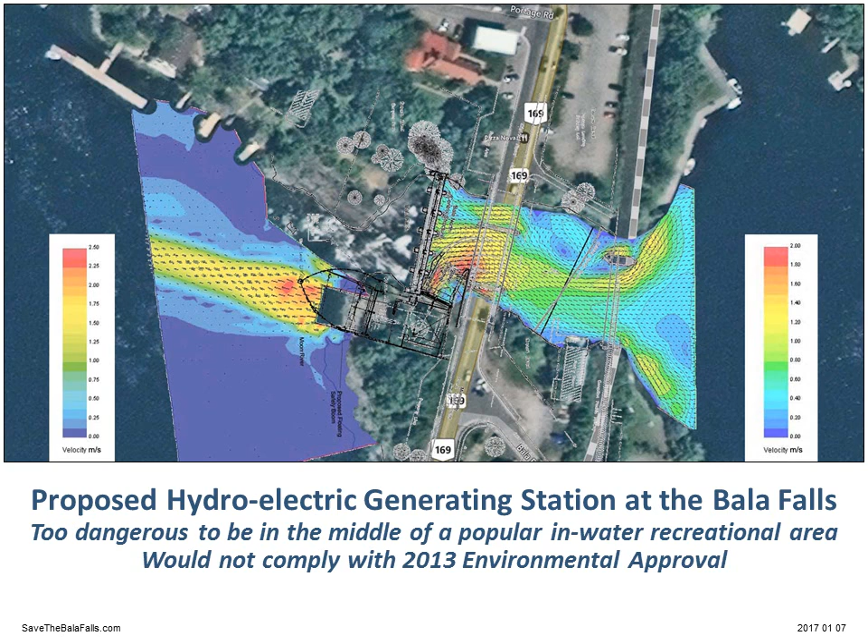It is January 2017, and after 11 years, the proposed hydroelectric generating station at the Bala Falls still has serious, unaddressed public safety issues. One of the public safety issues is that the proposed generating station would make the water in the Moon River dangerous outside of the proposed downstream safety boom. The upstream safety boom would need to be moved farther upstream, and during construction, the upstream cofferdam would risk damage to both the Bala North Dam and the district's highway bridge.

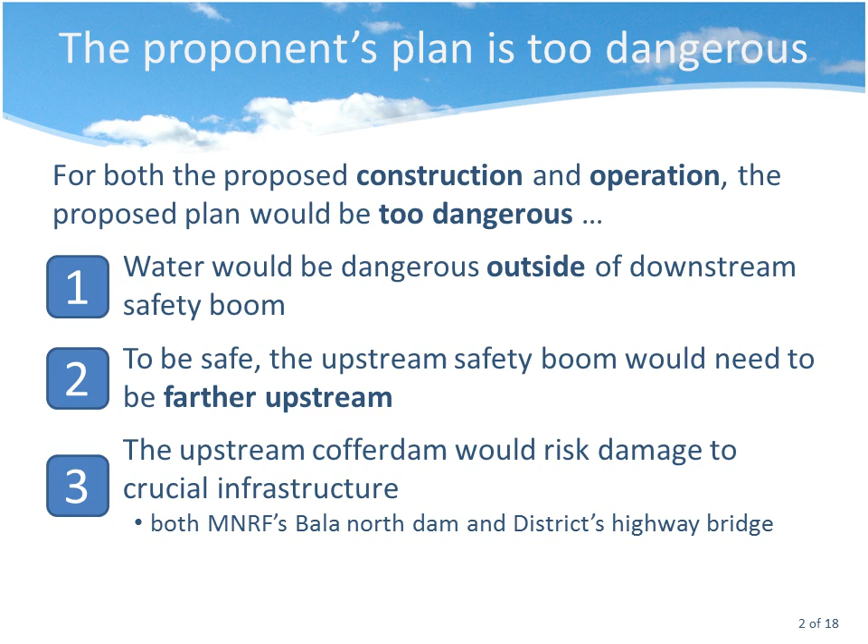Here is some background information on why these are serious, unaddressed issues. In 2011, the Ministry of Natural Resources and Forestry released a document, Public Safety Measures Plan for the Bala Dams. And one of the requirements in this is that the public be warned in advance of increasing flow to the Moon River.

Another item is the Canadian Dam Association has a document called Guidelines for Public Safety Around Dams, where they state that a safety boom acts as a physical barrier to delineate a dangerous water area. And the word delineate is serve as the outline of. That is, there is an obligation that the safety boom fully encompass any dangerous water.

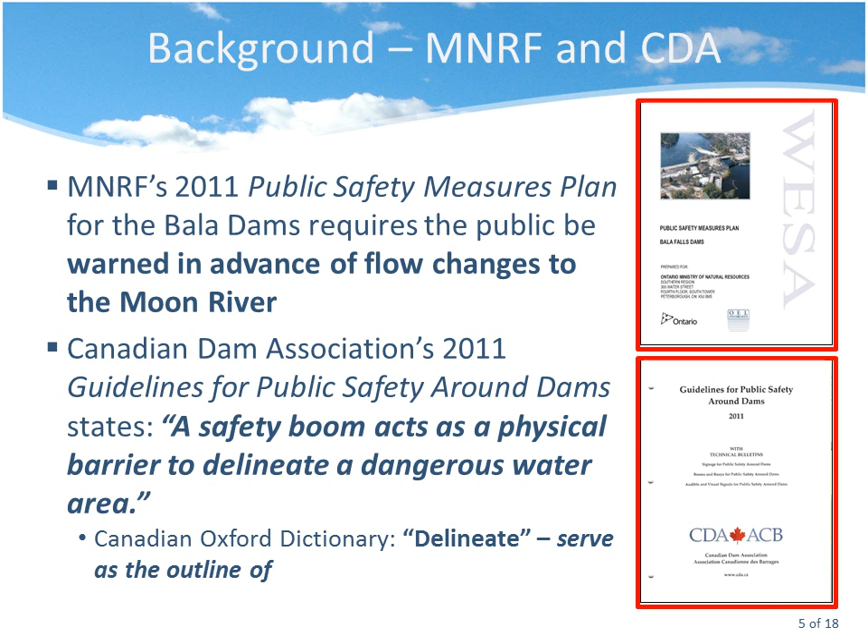As further background to our concerns, as part of their assessment for this proposed project, in 2012, Transport Canada completed a review of this proposed project in which they stated that the maximum safe water velocities are up to 0.5 to 0.7 meters per second. And as we'll see later, the problem is the proposed project would create flows more than double this outside of the proposed safety boom. Transport Canada in 2014 did release an approval under the Navigation Protection Act, but what's very important is to understand what this approval means.

The Navigation Protection Act has no mandate for the Moon River. Transport Canada has no mandate for any in-water recreation, such as the swimming, wading, and scuba diving that are very popular both upstream and downstream of the proposed project. So the 2014 approval from Transport Canada makes no statement as to whether boating would be dangerous in the Moon River as a result of the proposed project, or whether swimming would be dangerous upstream or downstream of the proposed project.

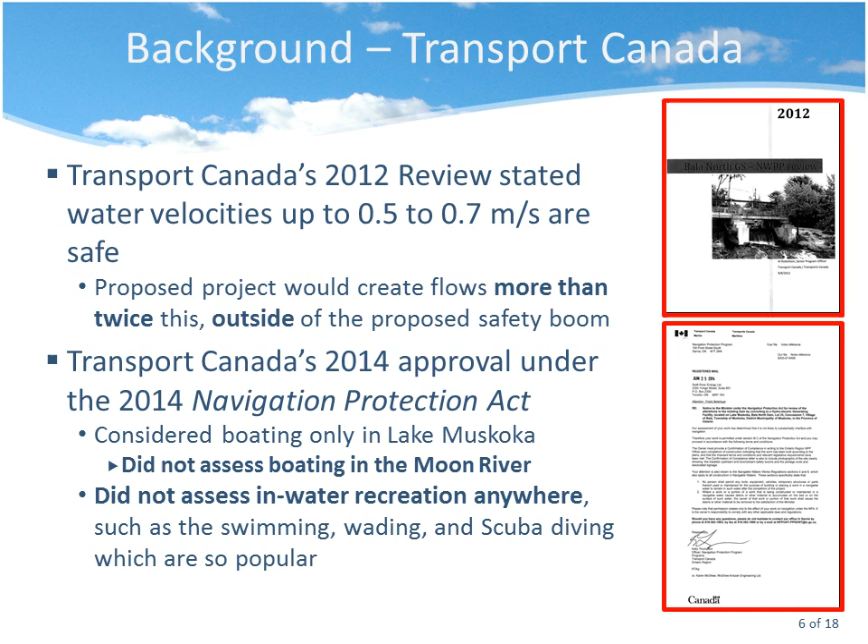So now we have this diagram, and what it shows is that the proposed generating station is outlined in the red box, and it would produce flows going downstream, westward, along the Moon River. And the problem is that the flows inside the proposed safety boom are just as fast and turbulent and dangerous as the flows outside of the proposed safety boom. And these flows would extend more than 160 feet down the Moon River outside of the proposed safety boom. That is, the safety boom would not delineate the dangerous waters as is required by the Canadian Dam Association.

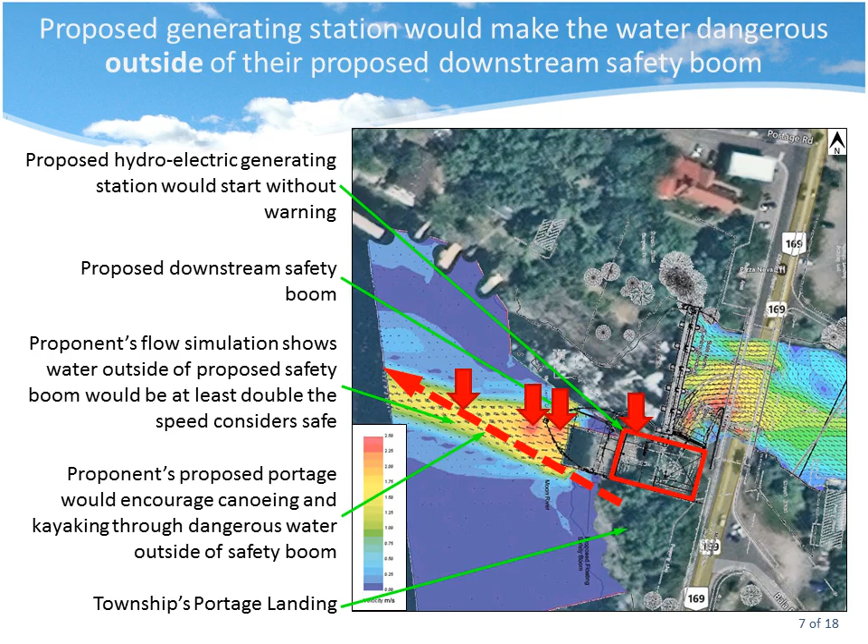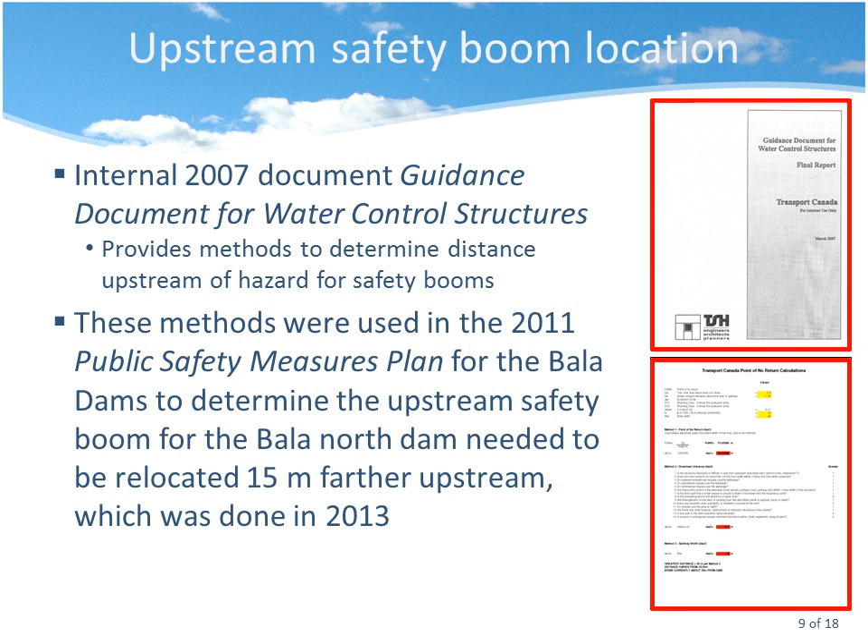The next concern is the location of the proposed upstream safety boom. The methods and calculations in a Transport Canada document were used by the 2011 Public Safety Measures Plan for the Bala Dams to determine that the safety boom upstream of the Bala North Dam needed to be relocated 15 meters farther upstream, which was subsequently done in 2013. The Public Safety Measures Plan for the Bala Dams found that the upstream safety boom needed to be 50 meters upstream of the Bala North Dam.

The Transport Canada calculations show that if the hazard, which was originally the Bala North Dam, is remotely or automatically operated, then it requires the safety boom to be an additional 10 meters farther upstream. So rather than 50 meters, it would need to be 60 meters upstream. However, in addition to the proposed generating station being automatically operated, the intake is upstream of the Bala North Dam. So instead of being 60 meters upstream of the Bala North Dam, the upstream safety boom would need to be 60 meters upstream of the intake for the proposed generating station, and that is, the upstream safety boom would need to be located about 75 feet farther upstream in the Bala North Channel.

The problem is, this would prevent boats getting to or from Purk's Place. Not being able to rent boats is an infringement on riparian rights, and this would require some negotiation or settlement that has not yet happened.

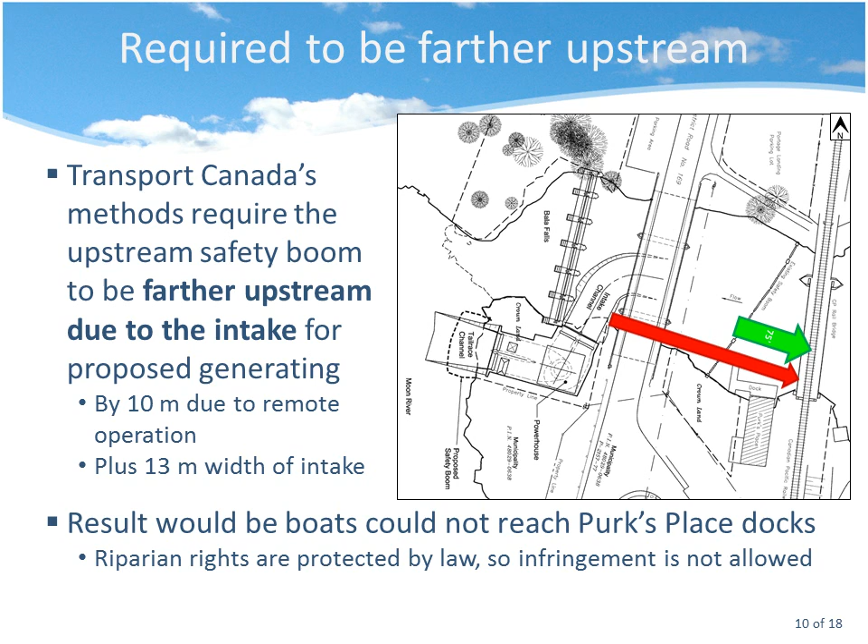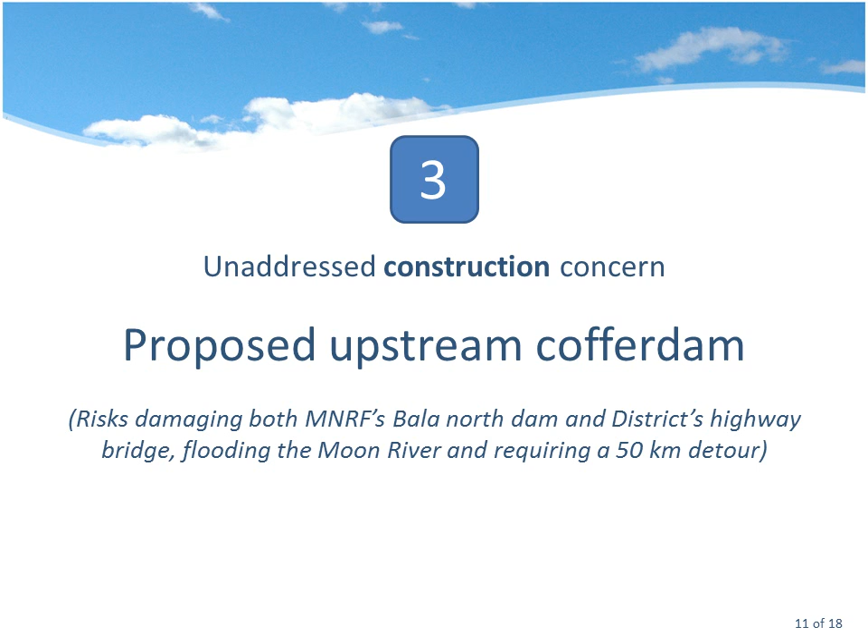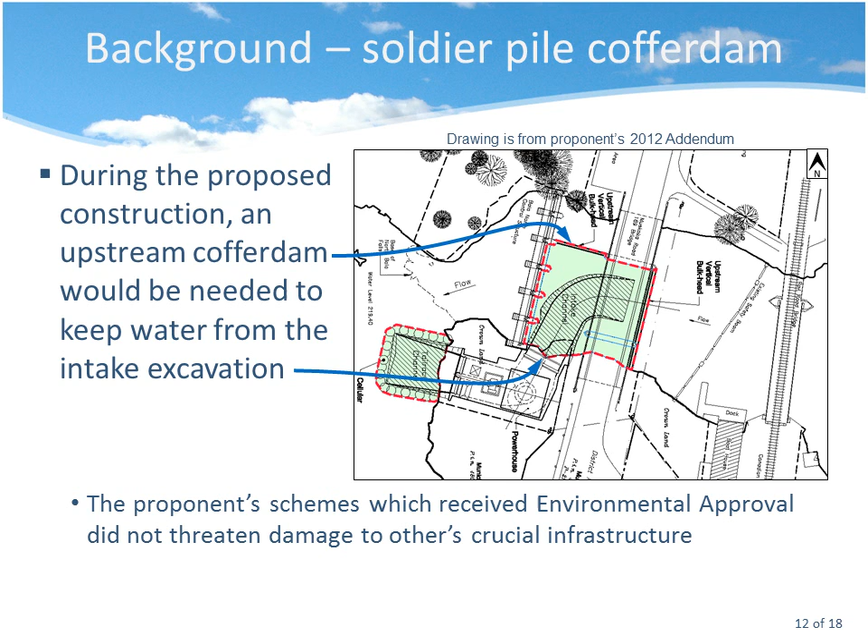The third concern is, rather than during the operation, this is a concern during the proposed construction, and that is of the upstream cofferdam. During the proposed construction, the proponent would need to build a temporary cofferdam around the intake for their proposed generating station. The blue arrow shows a view of where this would be. And here is that view.

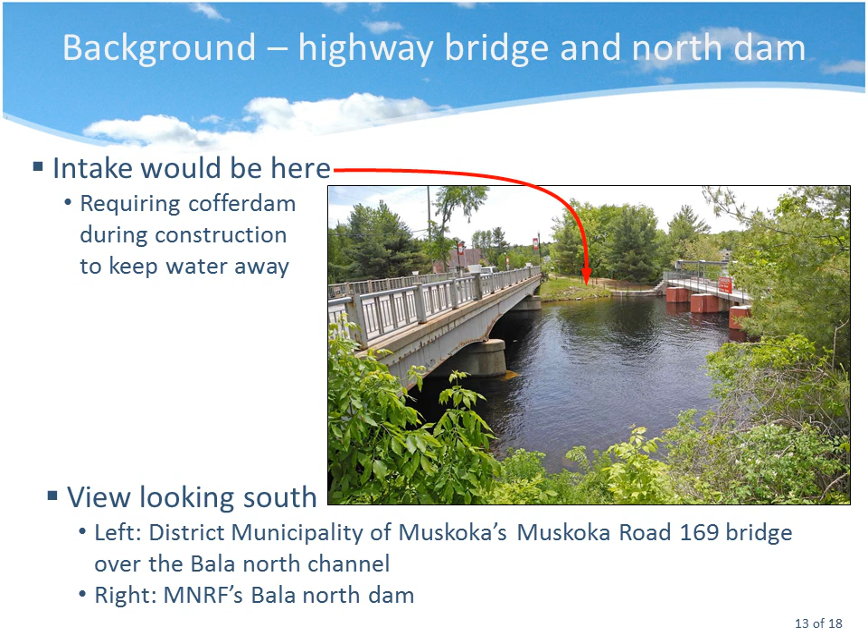On the left is the District Municipality of Muskoka's highway bridge over the Bala North Channel, and on the right is the Bala North Dam. The intake would be right across here, and in order to keep the water away from this intake during the proposed construction, the proponent would need to build a cofferdam. What I'd like to highlight is, you'll notice on the left here are the support piers for the district's highway bridge, and on the right are the support piers for the Bala North Dam.

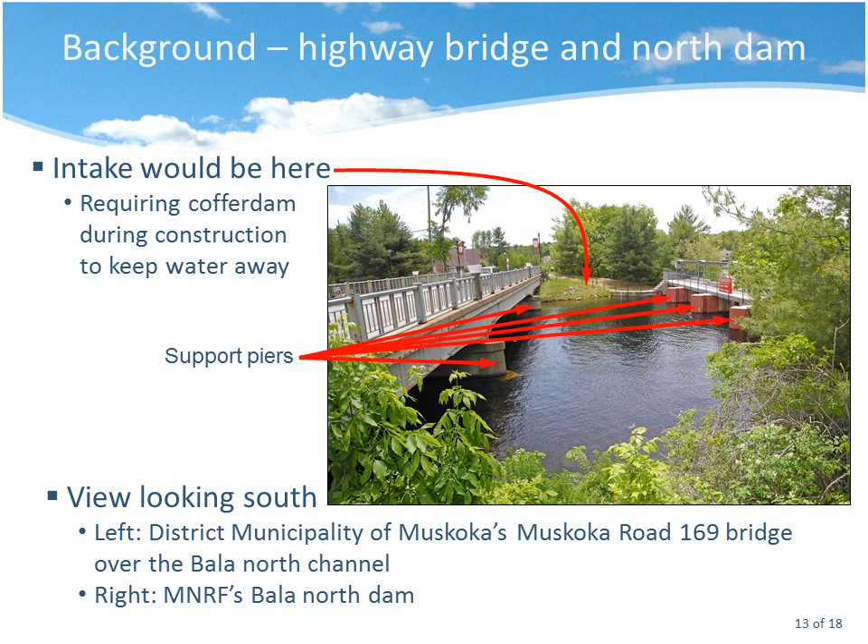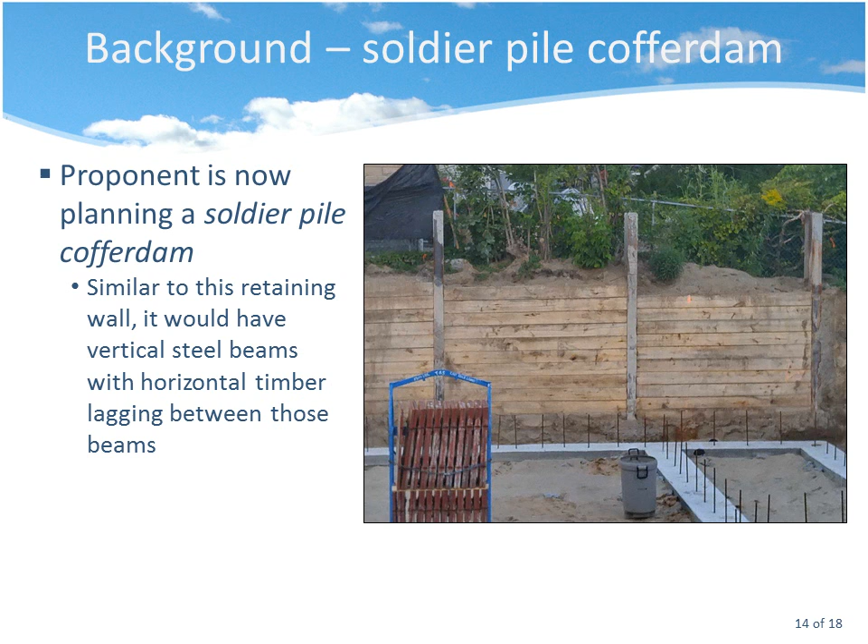While not presented before for their environmental assessment, the proponent is proposing to use something called a soldier pile cofferdam, which is similar in construction to this retaining wall here, and that is, there are vertical steel beams embedded in the ground, and between those beams is timber lagging. The problem is these steel beams. They would need to have 1 foot diameter holes bored 5 feet into the ground in order to hold back up to 10 feet of water.

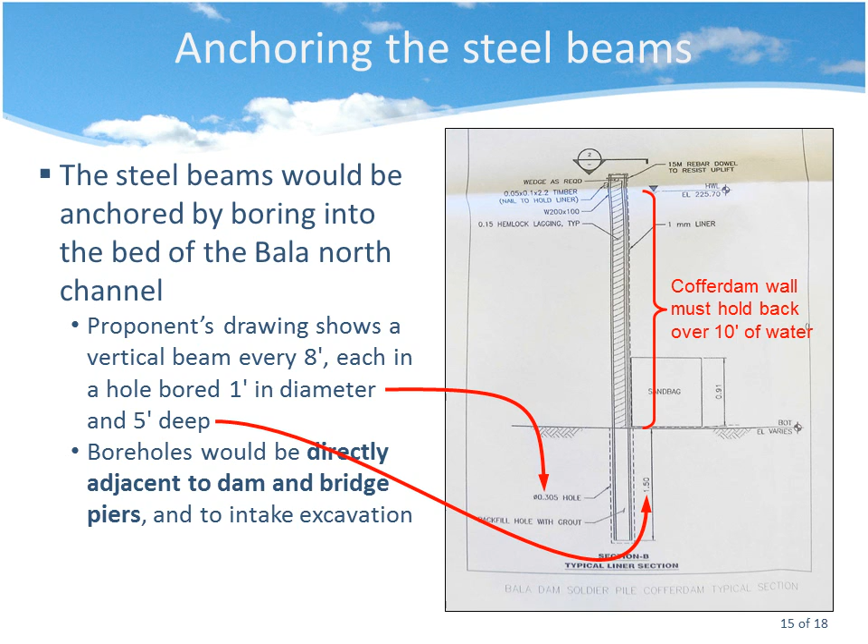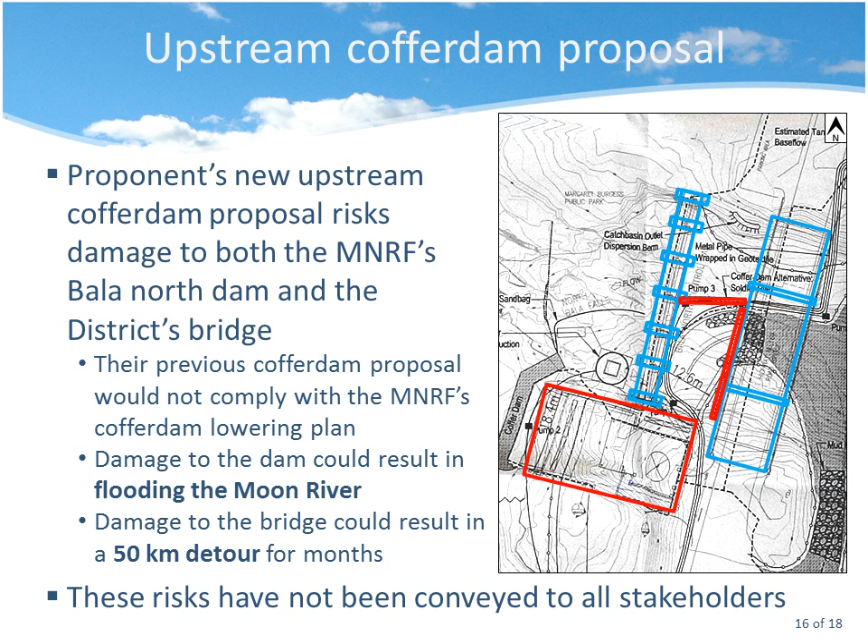This is the kind of environmental impact that is supposed to be disclosed to all stakeholders as part of an environmental assessment, and yet this is a new plan that the proponent has, was never described before for their environmental assessment, and this is one of the reasons why we say the environmental approval isn't valid anymore, because the proponent is making environmentally significant changes, and these have not been conveyed to all of the stakeholders.

Here we have a slightly larger view of the proposed construction site, with the Bala North Dam on the left, the district's bridge in the center, and the proposed construction site south of that. And here's where it gets even more strange, is the proponent is showing that they would put a crane for their proposed construction site blocking the flow through the Bala North Dam. The MNRF has said the proponent isn't allowed to block flow through the North Dam in case it's needed during construction if there's an unusually high amount of rainfall. And yet here it is, just a few months ago, the proponent showing that they would be blocking the flow through the Bala North Dam.

And the proponent is showing that they would put settling tanks in the Don's Bakery parking lot, even though this is not allowed by their lease with the Township of Muskoka Lakes. That is, the proponent is providing conflicting information to different stakeholders, and this is, again, the reason why an environmental assessment should be done, because it makes sure the same information is provided to all.

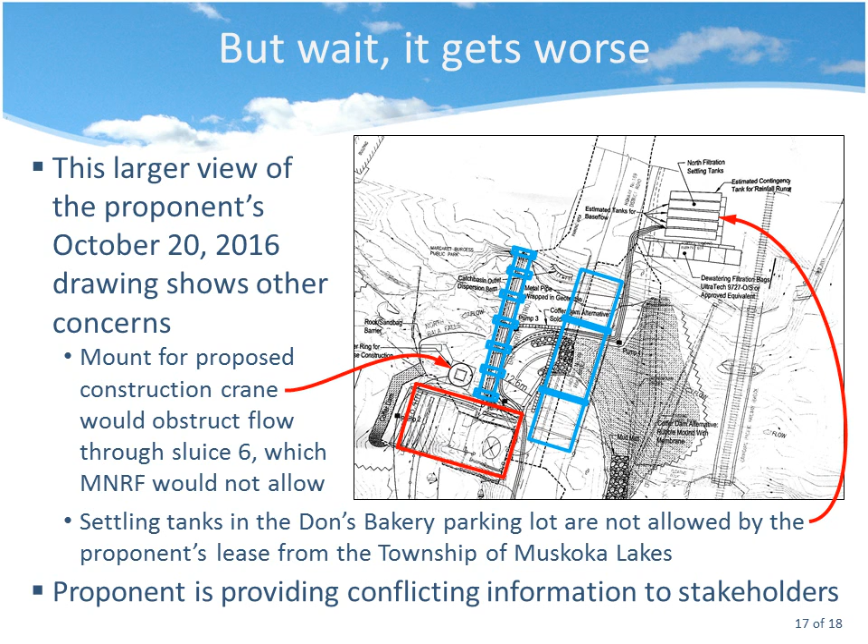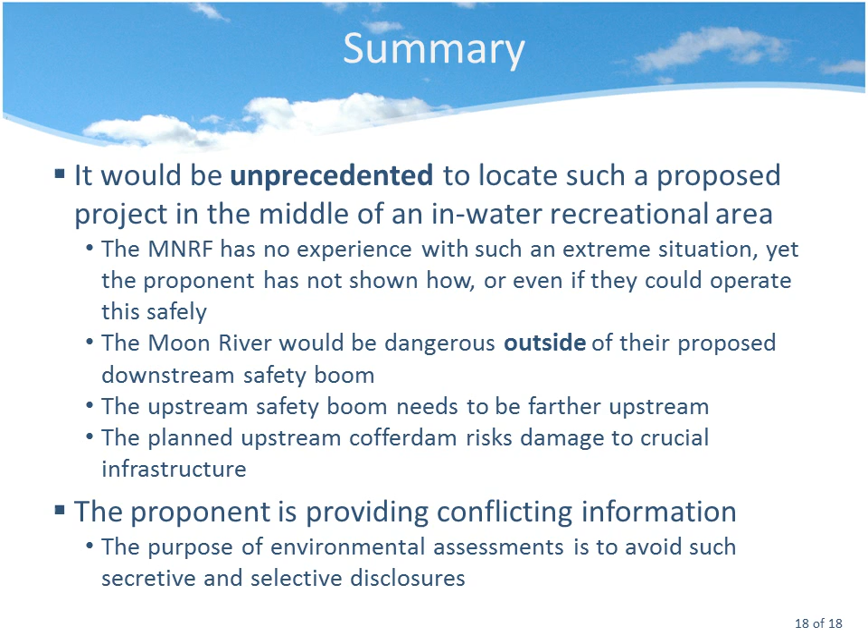So this is why we say there are serious, unaddressed public safety issues. It would be unprecedented to build a hydroelectric generating station in the middle of an extremely popular in-water recreational area. And the plans show they haven't figured this out. They would make the Moon River dangerous outside of the proposed downstream safety boom. The upstream safety boom would need to be relocated farther upstream, and the proposed upstream cofferdam would risk damage to both the Bala North Dam and the district's highway bridge. And the proponent is providing conflicting information to different parties.